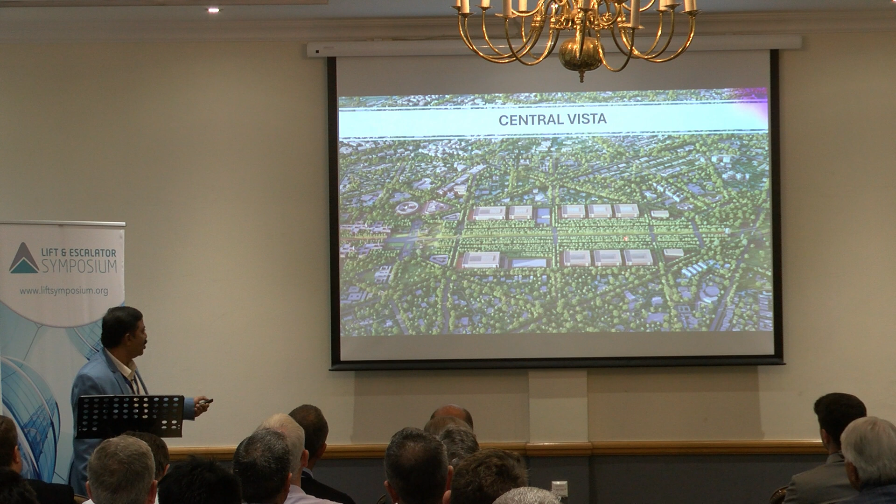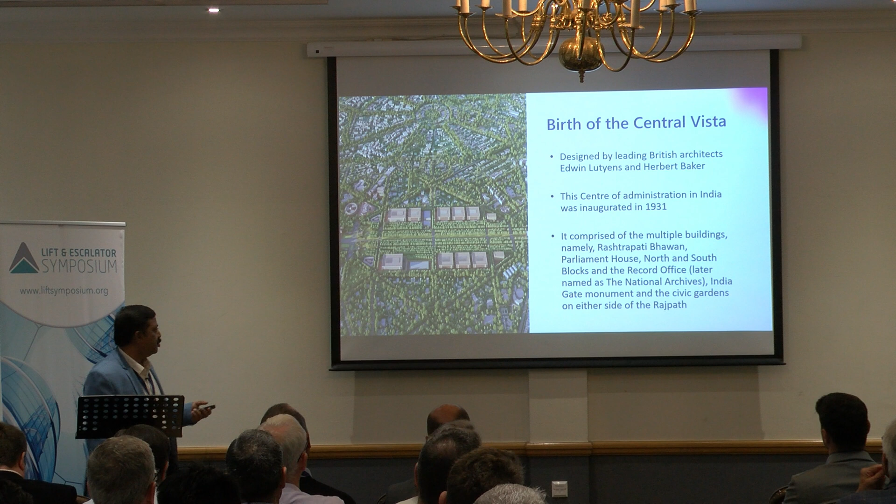The birth of Central Vista was in 1931 as the center of administration of India, designed by then-leading British architects Edwin Lutyens and Herbert Baker. It comprised multiple buildings, namely Rashtrapati Bhavan, which is the President's residence and office, Parliament House, North and South Block, the record offices, India Gate Monument, and the gardens in Rajpath in New Delhi.

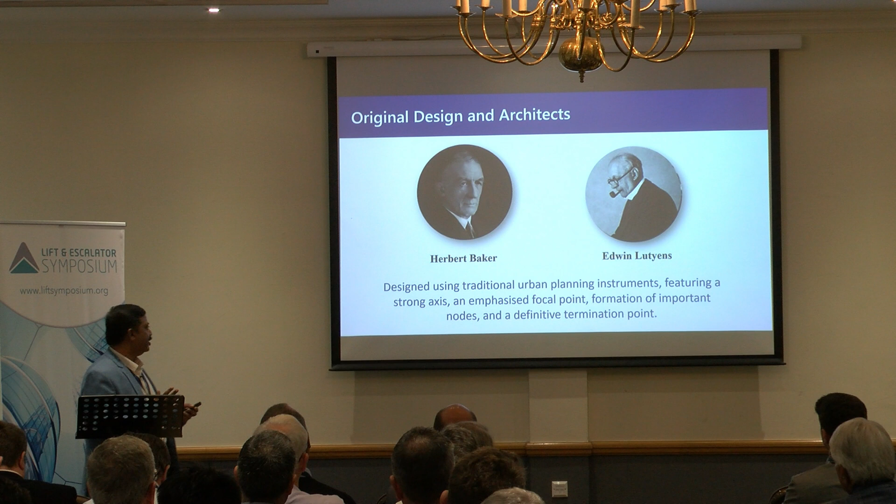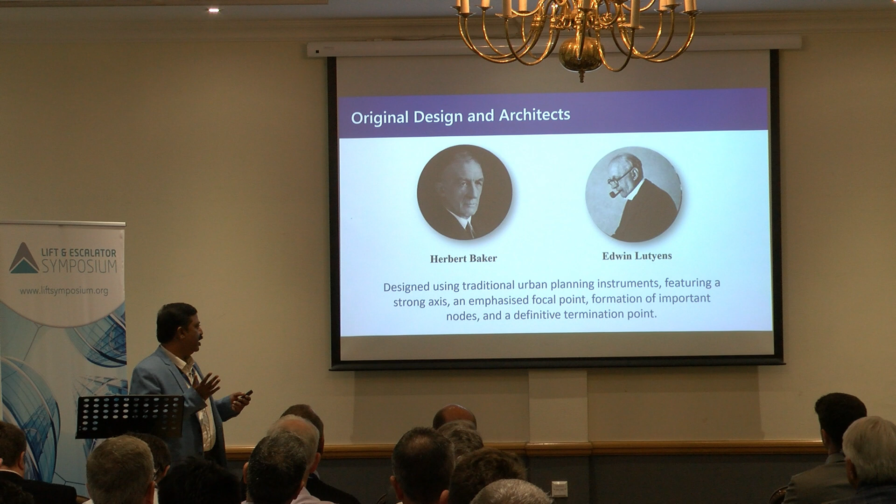Architects Herbert Baker and Edwin Lutyens designed this total plan using traditional urban planning instruments, featuring a strong axis, a sense of emphasized focal point, a definitive termination point, and a formation of important nodes in between.

Then came the development and redevelopment. What exactly is the objective? It is to improve the productivity and efficiency of the administration by providing highly functional and purpose-designed office infrastructure, especially in terms of creating modern workspaces, constructing green buildings, sustainable development, and clean transportation.

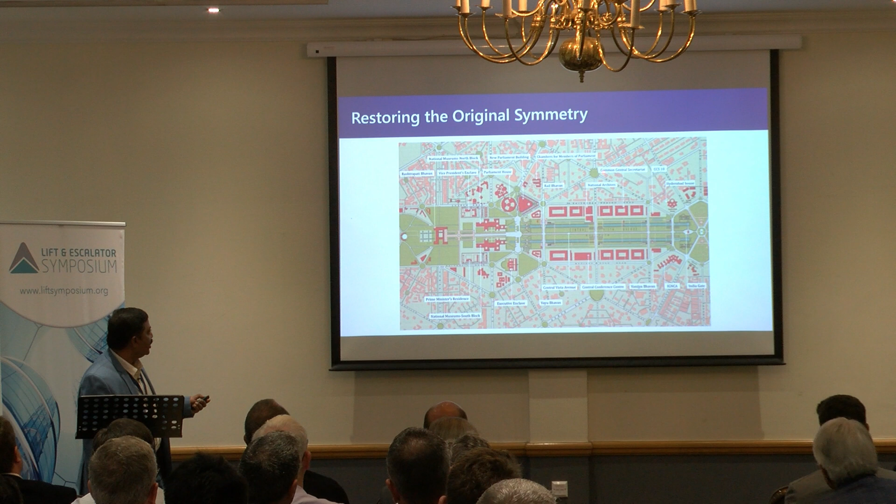The guiding principles for the Central Vista development or redevelopment master plan: one is to ensure that they restore the original symmetry in terms of the existing buildings, and add a few buildings like the Vice President Enclave, Prime Minister's Residence, National Museum, Common Central Secretariat, and the new Parliament building.

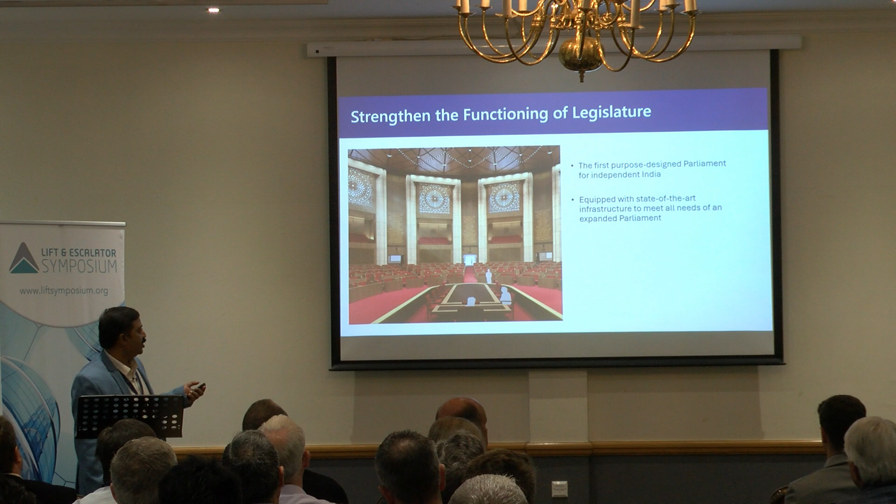The other guiding principle was strengthening the functioning of the legislature, being designed to be the first purpose-designed parliament for independent India, equipped with state-of-art infrastructure to meet all the needs of an expanded parliament.

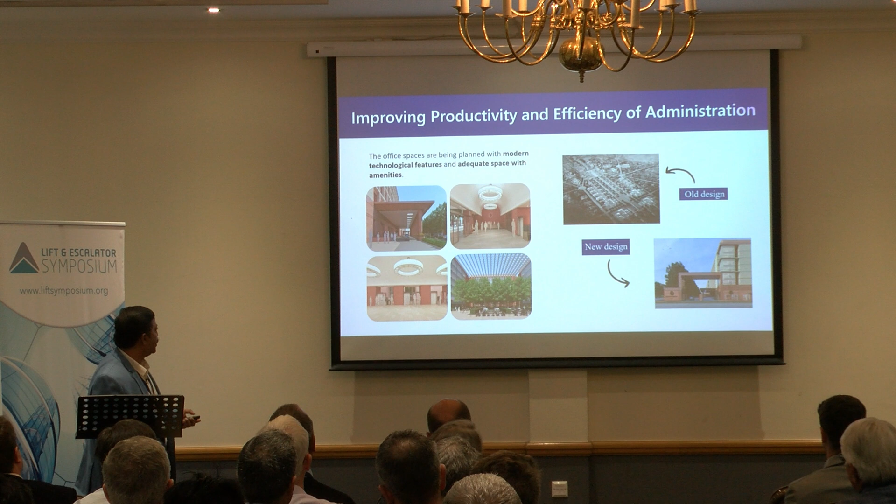Improving productivity and efficiency of administration was also a very key element. You can see the change from the old design to the new design, which is modern and contemporary, with more modern technological features as well as adequate amenities.

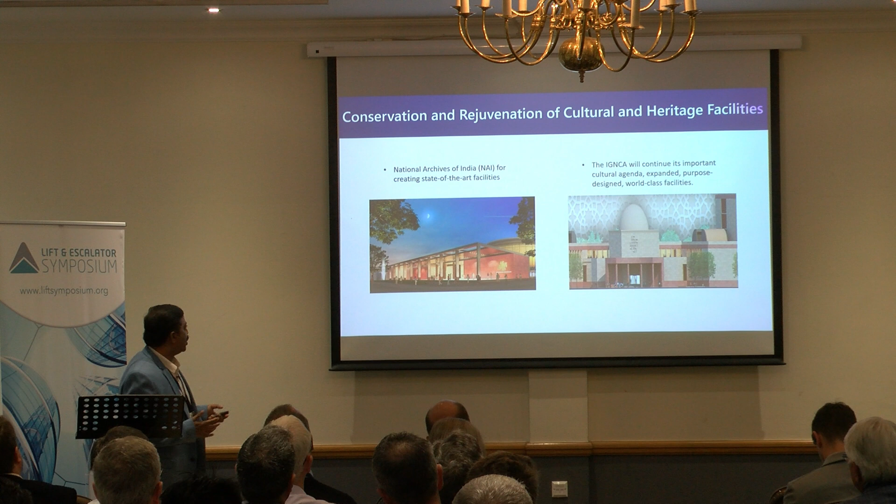Then it was important to ensure that you conserve and rejuvenate the cultural and heritage facilities, bringing them all together and housing them in ultra-modern complexes like the National Archives of India. And to further the cultural agenda, the Indira Gandhi National Center for Arts would work for that.

Also, because it's a very highly dense area and all the VIPs are going to stay and work there closely, it was important to provide adequate and secure infrastructure for all the executive offices.

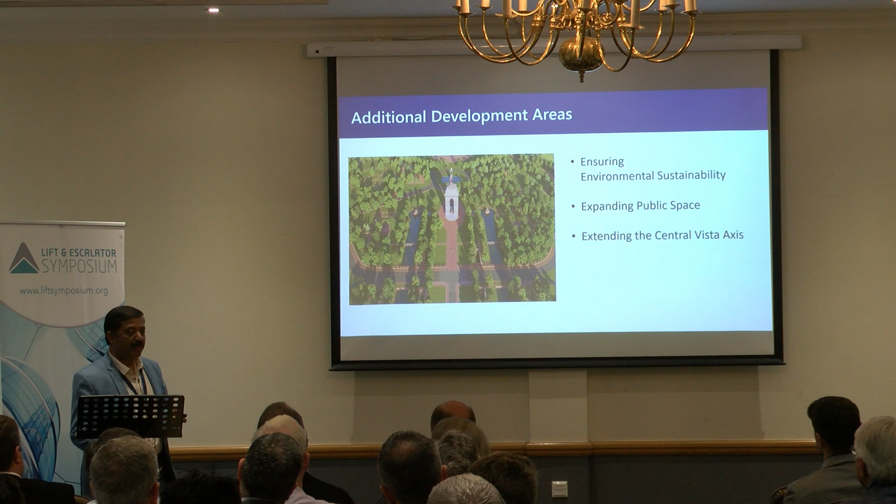Additional development areas included ensuring environmental sustainability, expanding the public space, and extending the entire central vista axis. Promoting transit-oriented development was a key feature.

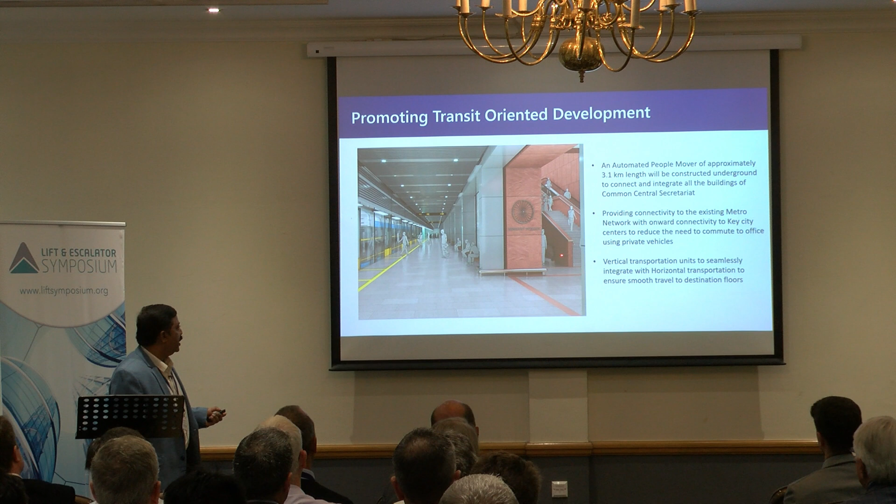An automated people mover, approximately 3.1 kilometers in length, was constructed underground, connecting the entire axis of the Central Vista building and providing connectivity to the existing metro networks. We had to ensure that vertical transportation design was seamlessly integrated with horizontal transportation to ensure proper, efficient reach to the destination floors.

The vertical transportation design considerations were to ensure alignment with the guiding design principles of the redevelopment, and need-based design based on building requirements. When I say need-based design, these buildings were not very tall, like ground plus 2 or ground plus 3, but each building has a different need. The Central Vista Parliament building was very large in expanse, so we needed to ensure that elevators were placed right to ensure access from any corner of the building is easy.

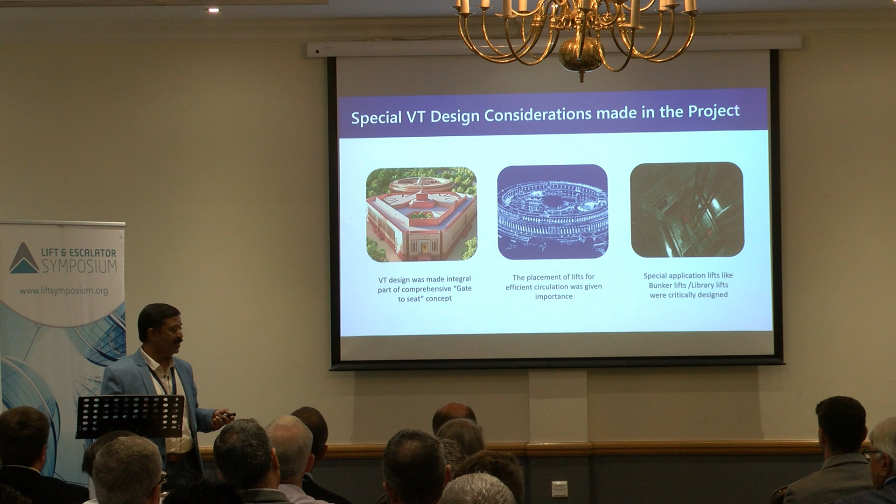Then eco-friendly features and seamless integration with horizontal transportation were key considerations. Vertical transportation design was made an integral part of the comprehensive gate-to-seat concept. Placement of lifts for efficient circulation was given importance. Then special application lifts, like for VIP residences, we had bunker lifts. For the National Archives, we had a lot of old manuscripts and books, where we had to design proper trolleys and systems so that books can be carefully carried up and down.

What are the design challenges we have faced?

Usually what happens, and I'm sure this is globally relevant too, is that architects design, and when it comes to vertical transportation, you have very limited space. Earlier one of our speakers mentioned how many lift shafts are required and whether the size of the lift shafts is adequate. We had a challenge where the lift shaft sizes were fixed. We couldn't do much; we had to accommodate the best we could within the limited space available.

Given the magnitude of the project, there are quite a number of multiple agencies involved, like a design firm, an architectural firm, the project managers, and the owner, which is the government. With all these agencies, the design discussions and design development were quite limited, so we could not put across as much as we would have wanted to.

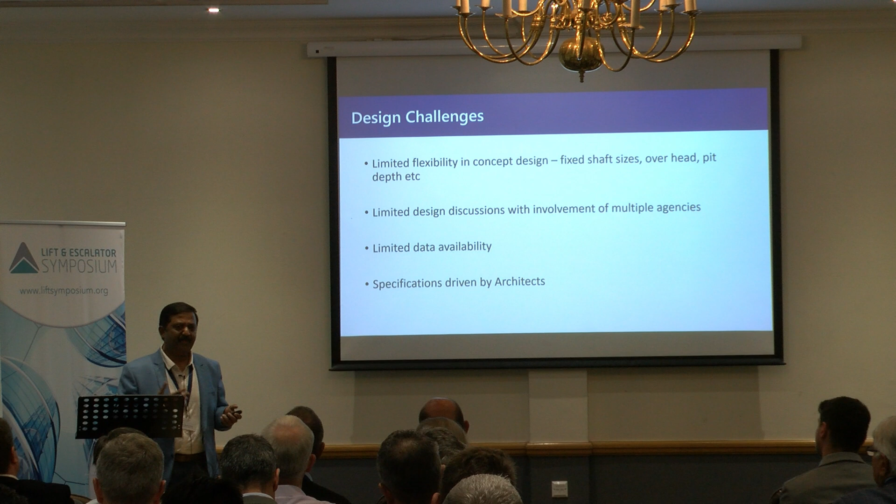Then data availability was limited. Specifications, of course, as vertical transportation consultants, we do specify for projects, but here the specifications were mostly designed and driven by the principles of the architects based on the building philosophy. So whatever we could do with our limited resources, we did.

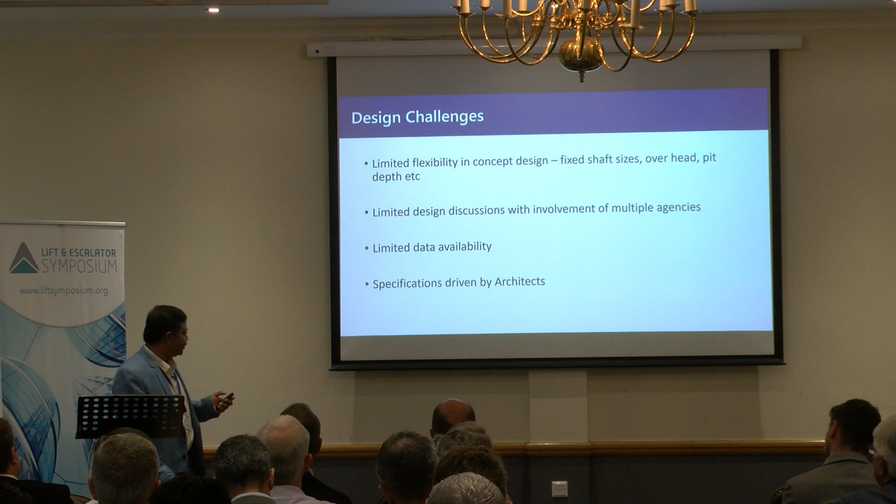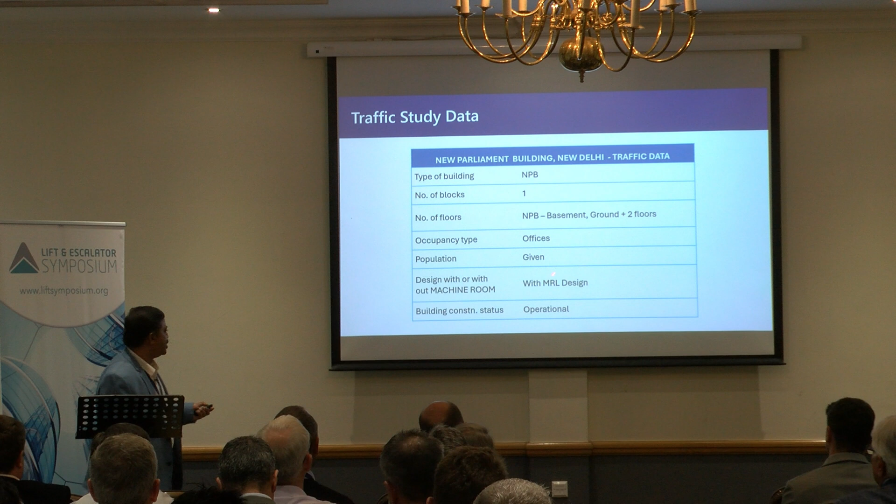Just to give a basic example of the new parliament building: the number of floors is not many—basement, ground plus 2 floors, offices, with a population of 4,000 given. We had to design with machine roomless design since it's only 4 floors. Right now it is operational, and just the first session happened day before yesterday in the new parliament building.

So having said this, design deliverance in iconic buildings could be of national importance, like a new parliament building, or it could be a 75-floor residential tower which we are doing in Mumbai. It's 75 floors tall, where the design considerations are quite different.

These are high-end luxury large apartment complexes, where as per the National Building Code of India, we consider for a 4-bedroom or 5-bedroom apartment a certain number of people. But the design considerations are changing a lot now, because the people residing in the apartment are one lot, but there are also at least 2 house helps, 2 to 3 cooks, 2 drivers—all these people need service elevators to ensure efficient service in that building.